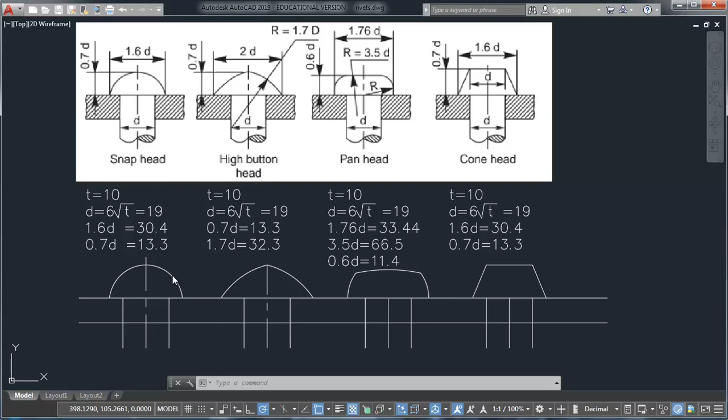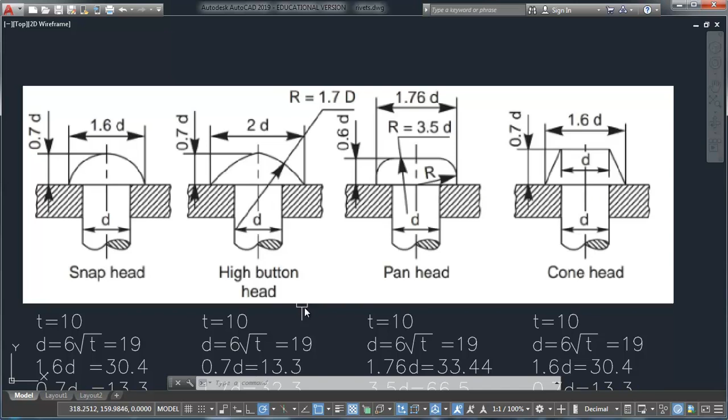Okay guys, so as I had promised, in this video I'll be explaining how to draw the different rivet heads. You've already seen these four types of rivet heads. All the measurements have been given in terms of the diameter d. This is the diameter of the hole that needs to be drilled in the two plates which are to be joined by riveting, and a rivet is going to be inserted, and the different heads are going to be implemented. Here you can see four of these heads, and below we have four more. So in all we have to learn about eight different rivet types.

Before going further, I'll tell you about the formula. Only the thickness of the plate will be provided to you in the exams, and you have to calculate the diameter of the rivet needed for that particular plate. The formula for that is 6 under root t. When we do 6 under root t for this thickness, that is 10, we get 18.98 or something, which is rounded off to around 19 mm. So we'll be taking 19 mm as the diameter for all practical reasons here.

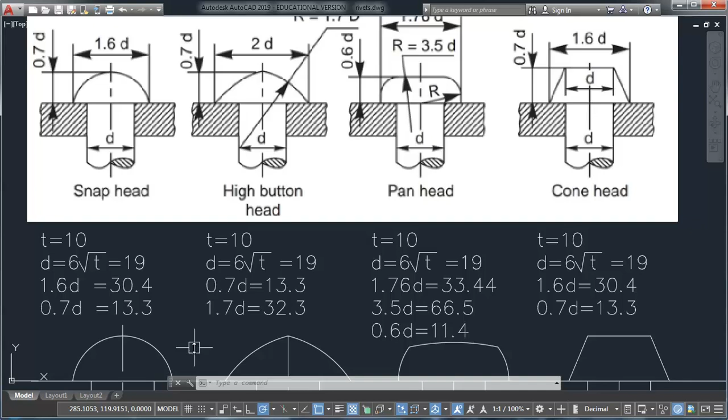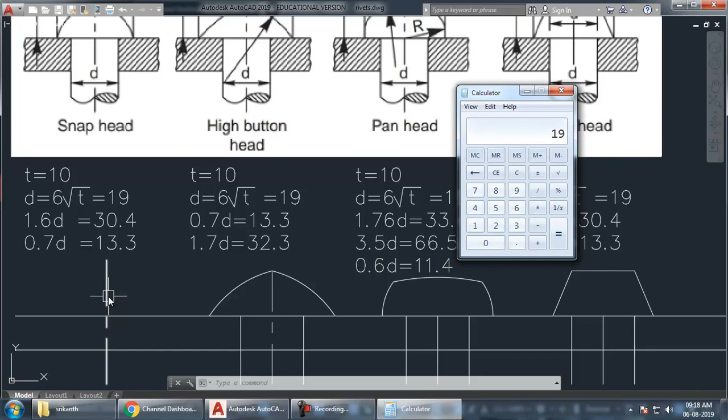Now when we have to start drawing this, what we have to do first is take the axis, and from the axis the first thing we have to draw is the diameter d. So 19 mm is the diameter, and what we have to do actually here is take half of that. Half of 19 is 9.5. So we will be taking an offset center of 9.5 on both sides, and then we'll just trim these lengths off.

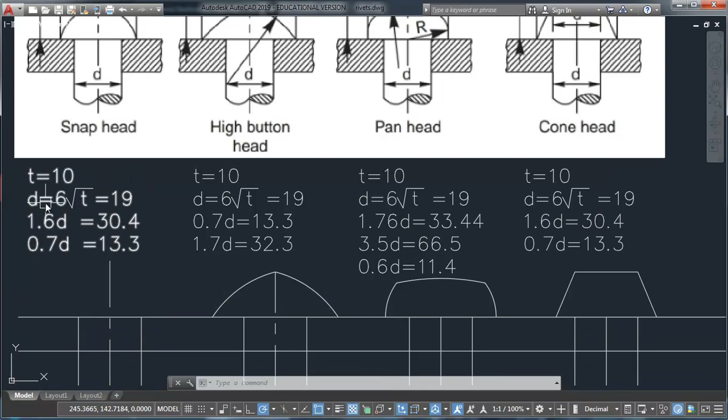Okay, so now we have to draw this dome. The diameter of the dome has been given as 1.6 times d. So whatever d we had over here, we have to multiply by 1.6 to get 30.4. So this is the diameter of the circle that we need over here.

The next thing we need is the height of this dome. The height of the dome needs to be 0.7 times the diameter, which comes out to be 13.3. So I'll take an offset center of 13.3, which is this length over here, 0.7 d. I'll take a line, and then I'll create a circle with the Center command. Center I'll temporarily place it here itself, and for diameter I want it to be 30.4. So I can choose diameter from here, and I can give 30.4.

So I can see that the dome is not exactly meeting this height. We want the top point of this dome to be exactly here. So what I'll do is take the Move command, M enter. I'll select the circle, apply the move command, and move it down a little. You can see the center of this circle has shifted slightly downwards. So that's how we want it to be.

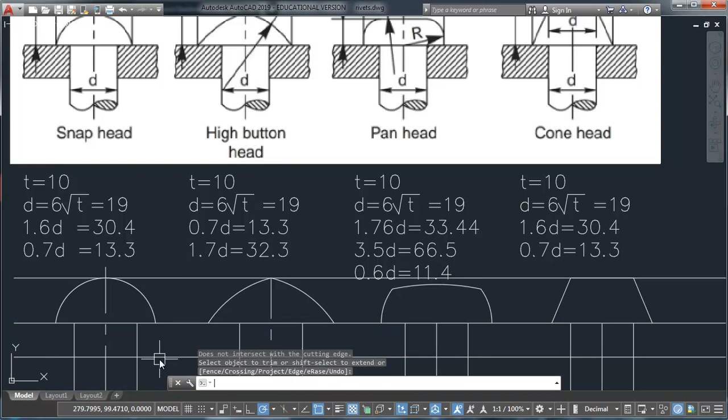Now what we have to do is trim away this lower part of the circle. So I'll select this line, TR enter, and click once on this to remove it. The top line we don't need, so I'll remove that as well. So this has created for me the snap head type of rivet.

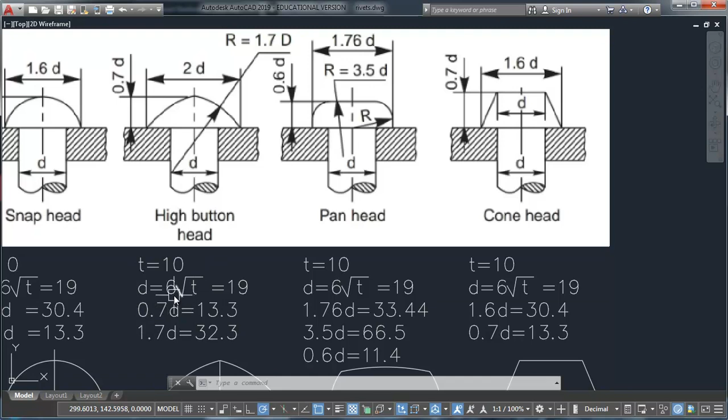Next, coming here, this one is slightly complicated, so we have to do some additional calculations. First, as usual, we calculate the diameter, which is 6 under root t, and it comes out to be 19, same as previous, because the thickness here is the same as before. If the thickness changes, you have to accordingly recalculate. Coming to the height, 0.7 times d, again it is the same as before, 13.3. Here there is an additional radius which is given as 1.7 times the diameter, so that comes out to be 32.3.

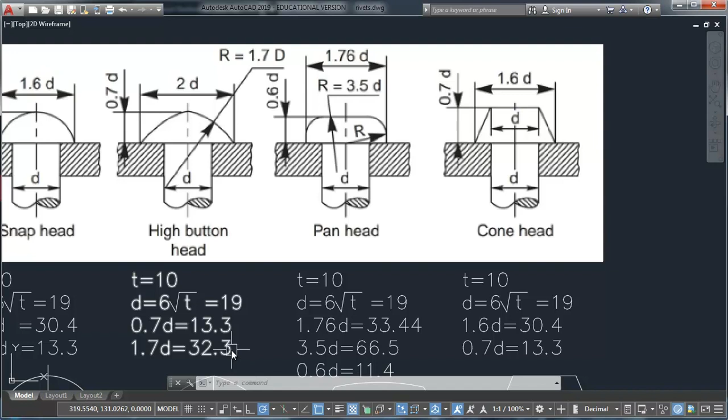So now what we have to do to create this is I'll just create the diameter as usual, and then take the height, offset 0.7 times d, that is 13.3. So I'll take an offset of 13.3 and create the offset. Now this is where I want the height to be, so I'll extend this line to meet this particular line here.

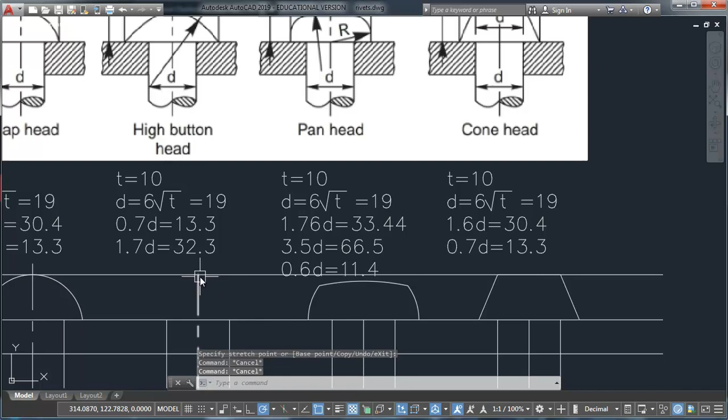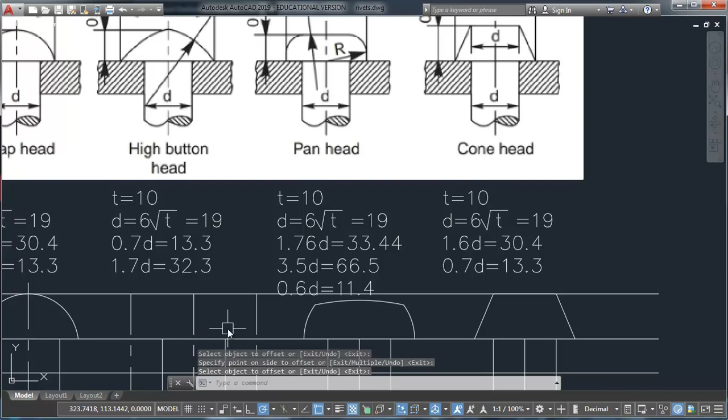Now I know the width of this bolt head as well. It comes out to be 2 times the diameter. So diameter here is 19, so 2 times that will be 38. I'll just take 19 on both sides, so technically I'll get double of that. So offset of 19, and I'll take this on both sides. Now the intersection of this line and this line - this is where the intersection is lying.

So now we need an arc here with a starting point here, ending point over here, having a radius equal to 1.7 times diameter. So 1.7 times diameter is 32.3.

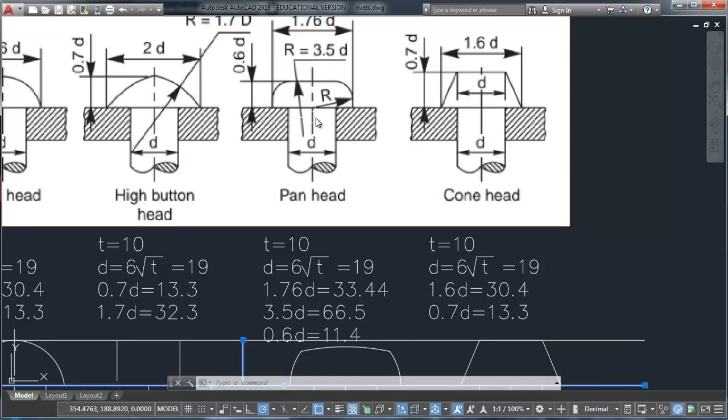So here we have to do something. We have to get back the menu. This particular option for arc is only available under this menu. We have all the options here. We have to choose start, end, and radius.

So now we click on the start, which is here, and end, which is here. You can see we are not getting our arc in the desired direction, which just means we chose the wrong starting point. The starting point needs to be here, ending point over there. So I'll again take the same arc option, start, end, radius, starting point here, ending point here, and now you can see the arc is going in the right direction.

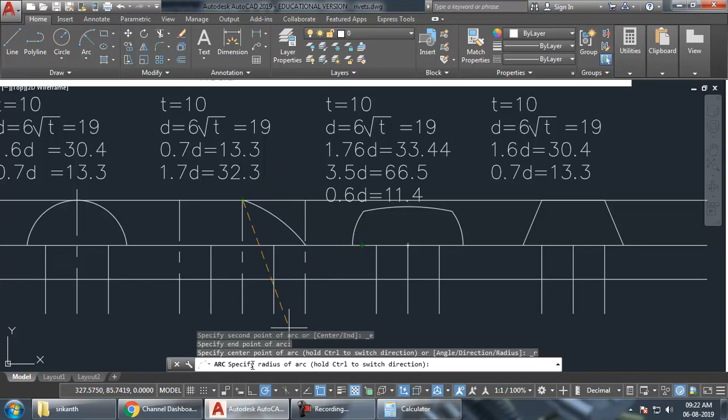Now I can just feed the radius it's asking for, which is 1.7 times d, coming out to 32.3. Enter. So now I've got this.

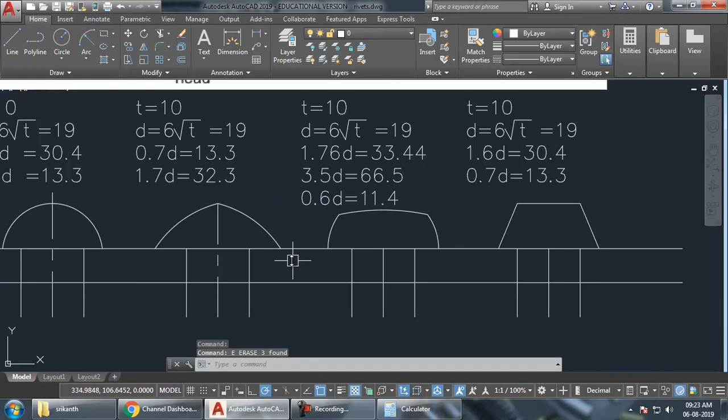So this is one side of the bolt. I can just mirror it using the MI shortcut. Select the object, press MI, enter, click 2 points on the axis, press enter again, and then remove all the things that are not needed. So this is how I create the bolt for the high button head.

Coming on to the next one, it appears very simple. When we first look at it, this appears to be a fillet, but according to the given dimensions it's slightly more complicated. Let me show you how to draw that. Let me remove this. This is how it appears.

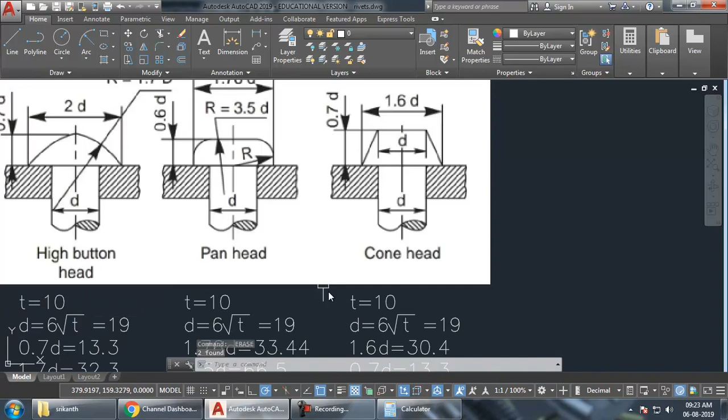Now, before proceeding, we have to do all the calculations, taking the thickness of the plate to calculate all these ratios asked in the question. I'll first take down this 0.6d. So 0.6d over here is 11.4. So offset 11.4.

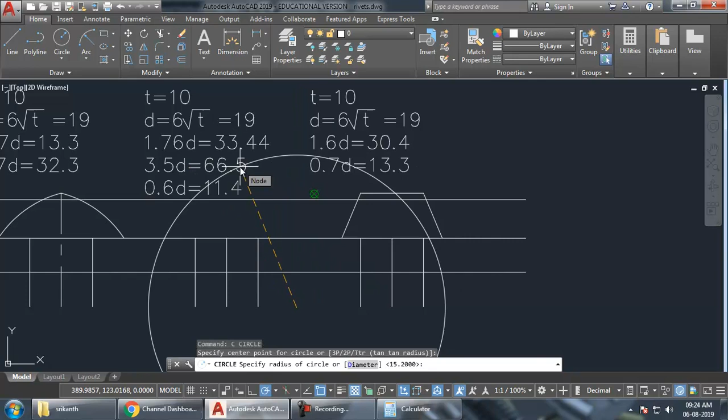After that, I have to create this radius, which is 3.5 times d. So I'll just create a circle randomly at some point, and take its radius as 66.5. That is what we want.

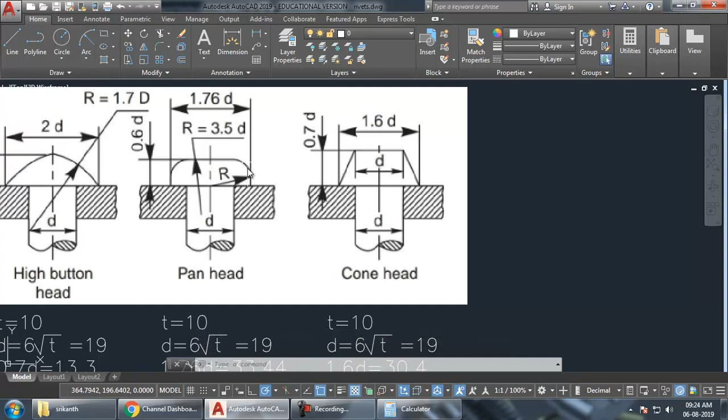Now I'll have to move it, enter this quadrant, move exactly a straight line from here. So this is the top part of this dome. It's not actually a straight line, because here the radius has been given something, and then from the center we want this to have again an arc. This is again not a straight line, it is actually an arc, and we know this dimension 1.76 over here.

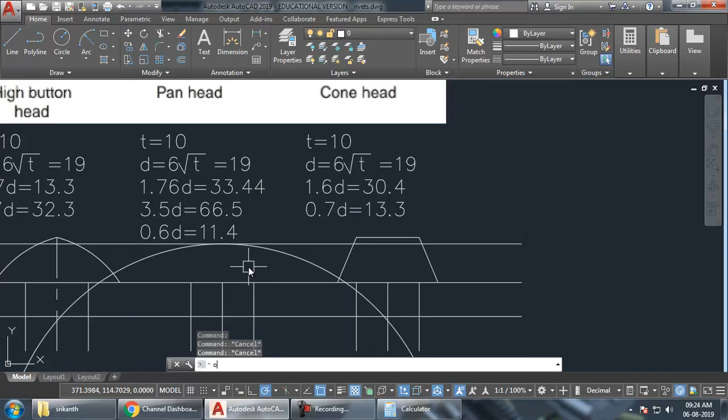So that's what we have to do. 1.76 times d is coming out as 33.44, so I'll have to take an offset, half of this. 33.44, half of this is 16.72. So I'll take offset 16.72 from the center on both sides, and then create a circle passing through this.

So technically what I'm getting is, from this point I'm getting a radius to this circle as whatever is given here, r. Width I've calculated from this, and the arc radius has been taken from this point, that is the axis. Now I need to trim this off.

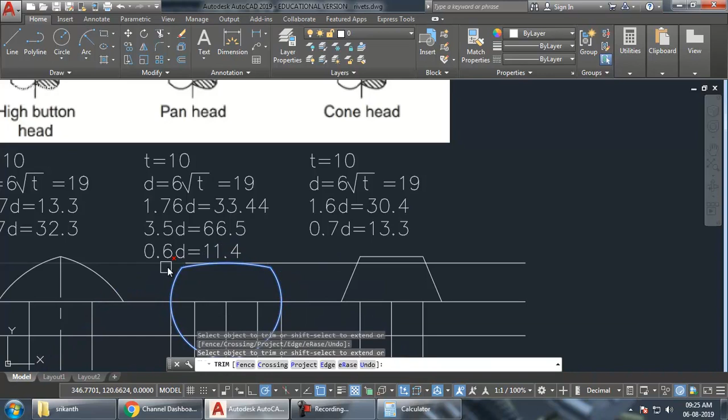I'll just select these two, TR, enter, and trim off whatever I don't need. This bottom part also I need to trim, so I'll select this, TR, enter, remove this, and remove all unnecessary lines. So this is how we get the pan head. You can see none of these edges are straight lines - they are all arcs of varying radii as given in this diagram.

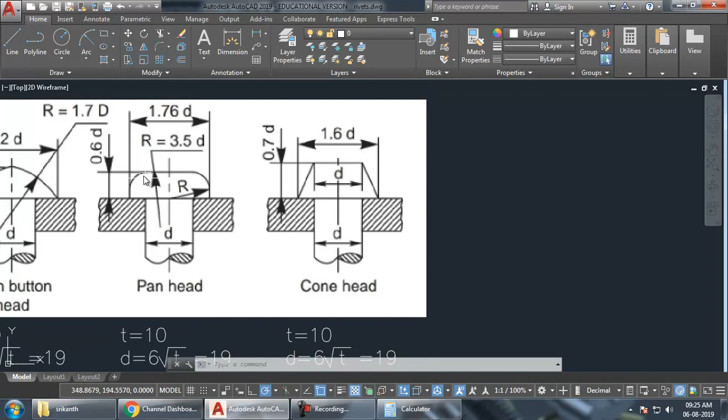The next one is cone head, which is very simple compared to all others. What you have to do here is again calculate all the measurements. Taking the thickness T, I've calculated diameter 1.6d required over here, and 0.7d, which is the height.

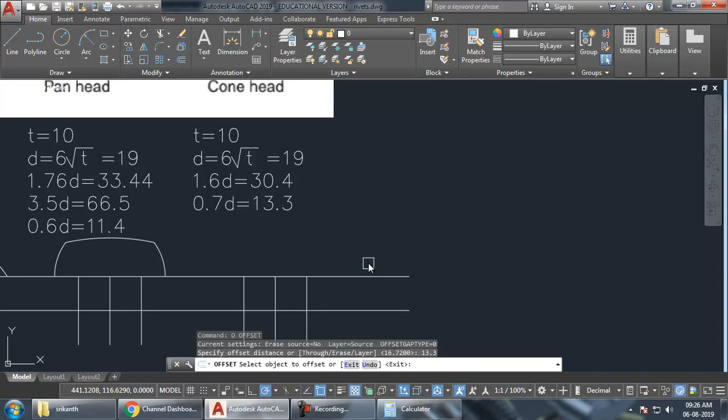So I'll start out with the height 0.7d, offset 13.3. I'll have to take this height, and then I have 1.6 times d. 1.6 times d is coming out as 30.4. Half of that I have to take offset on both sides, 15.2 both sides, and I'll have to join this with the extension of this, meeting over here.

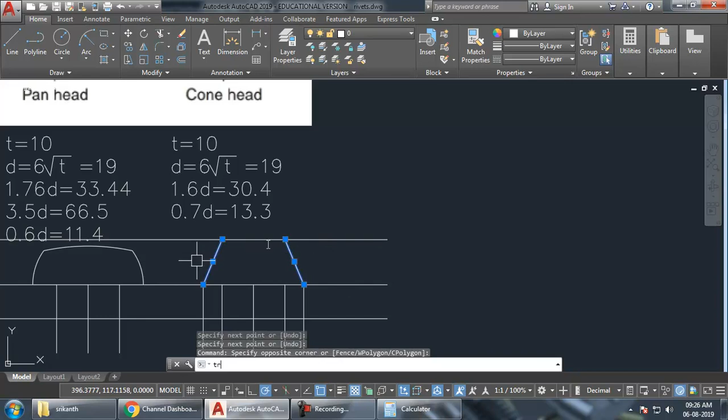So you can just click the starting point here and hover your mouse over here for some time, and you will get the tracking of this extended line. Join it to the top, select both these lines, trim off unnecessary lines, and delete the bottom lines. So that's how we get this cone.